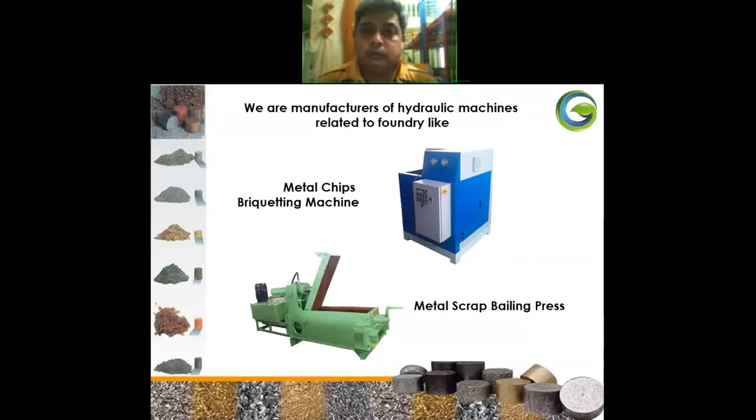Now we'll go into our topic, that is briquettes. First we would like to explain what is meant by briquetting, that is metal briquetting. Briquetting is a process that compresses metal scrap and waste into compact, easy to manage blocks, with density and resale values that rival those of solid metals.

Basically, briquetting is compacting the loose material available, maybe boring in the form of turning or any loose content. So when we compress that material, automatically the density of that material increases and the surface to weight ratio is reduced, due to which that material becomes very easy for transportation, for handling, for melting.

Various losses occurring during the use of this loose metal can be reduced. What type of losses, we'll see afterwards in this presentation.

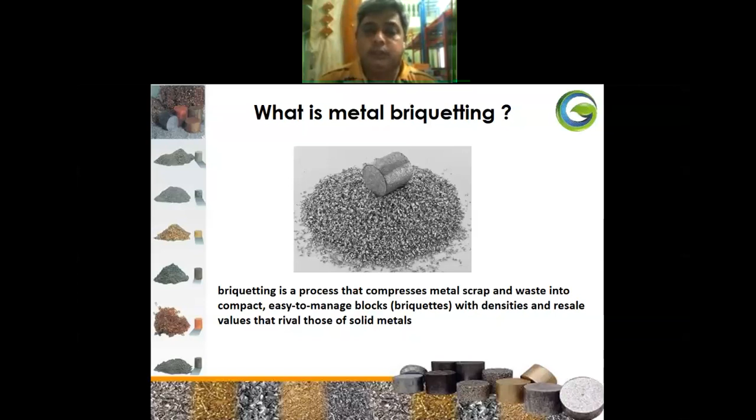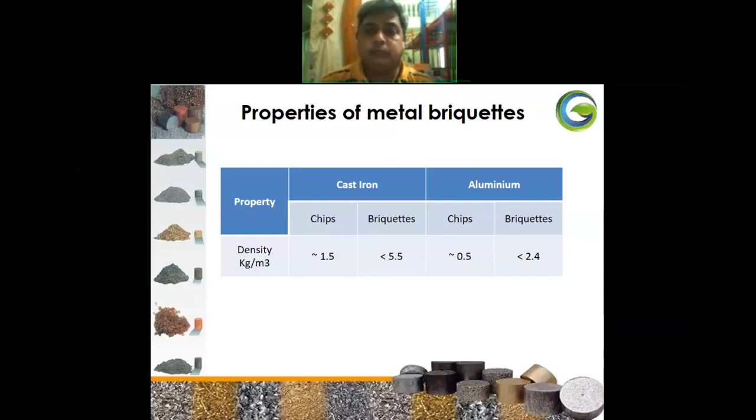So the side benefits we get after briquetting material: we can recover the valuable cutting fluids. Because any boring or turning coming out of machining has almost 50% cutting fluid in that material, and it is very difficult to take that cutting fluid out of the boring.

One method is that we can use a centrifuge. By centrifuging, we can take out the material somewhat, but some cutting fluid will remain in the boring or turning. Because of that liquid, the material easily gets rusted. And when we use the material after 3, 4, 5 days in the foundry, we use the somewhat rusty material, which automatically gives a loss in using this material.

By briquetting, we can squeeze all the cutting fluid oil from the chip, and the oil will remain on the surface of the briquettes. So that oil we can reuse from the briquette, and because of the oil coming out of the briquette, the briquette will not get rusty as fast as the boring or turning would.

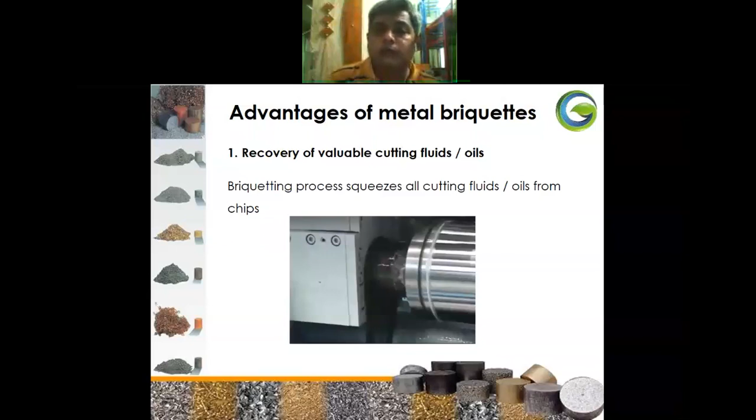Second, we can reduce spillage losses of chips, because when we transport or handle the boring or turning, it gets spilled everywhere—in the machine shop, during transportation, in the foundry, during use in the furnace. Everywhere some material gets spilled, and we don't get an account of that material at the end of the day. On average, 5% of the material gets wasted in spillage only.

So we can avoid those losses due to spillage of the metal during loading, unloading, storage, or charging.

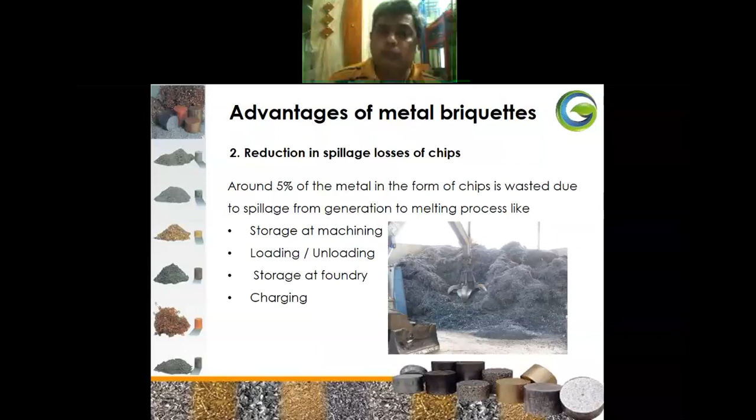Third is that transportation cost we can reduce. Suppose a truck takes load of maybe 1 or 2 tons of boring or turning, then it can take 3 to 4 times more load after briquetting the material, maybe 6 ton or 10 ton. So automatically your transportation cost will also come down.

We know that we are getting loss in the coolant, in the form of spillage, in the form of transportation, but we are not getting that accounted in our heat calculation, means heat cost, that will not get accounted.

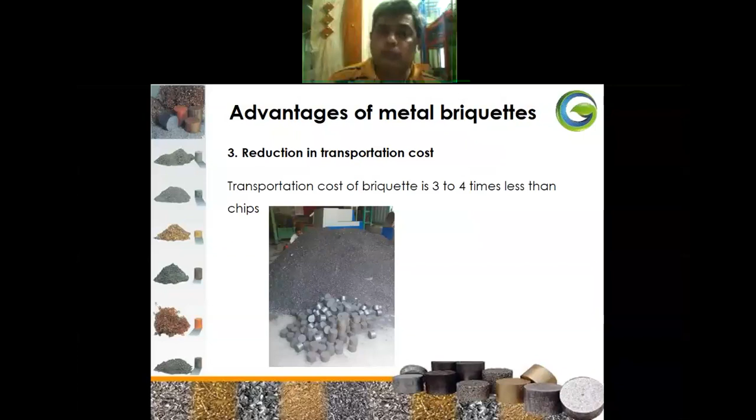Fourth is that we can avoid mixing of dust and other particles. Once boring is briquetted, dust or other foreign particles will not mix, and maintaining clean input for charging reduces slag generation during melting process. Even the mixing of one turning or boring of SG iron or cast iron, that mixing also we can avoid by doing briquettes. We can separately identify that. So this type of things we can avoid, which in turn at the end of the day happens in the form of loss to the organization.

It reduces oxidation of boring in open environment due to less surface area to weight ratio. Briquette oxidizes less than boring in open environment, which reduces slag generation during melting process. At the end of the day, when slag generation is more, then your lining life will also be reduced because of that slag. So that lining cost again we can reduce by generating less slag in the melting process. That also we can avoid by doing briquettes.

Due to less surface area to weight ratio, briquette oxidizes less than boring during melting, due to which slag generation will be reduced, furnace lining will be improved, molten metal will be increased, and all this what I am discussing today is actually what we have filled in the actual foundry shop floor. We have explained a lot of things in various foundries, and we have shown them where your boring or turning is giving loss, maybe small percentage, to your foundry. Actually we have seen that in the foundry shop. So what I'm talking is very real.

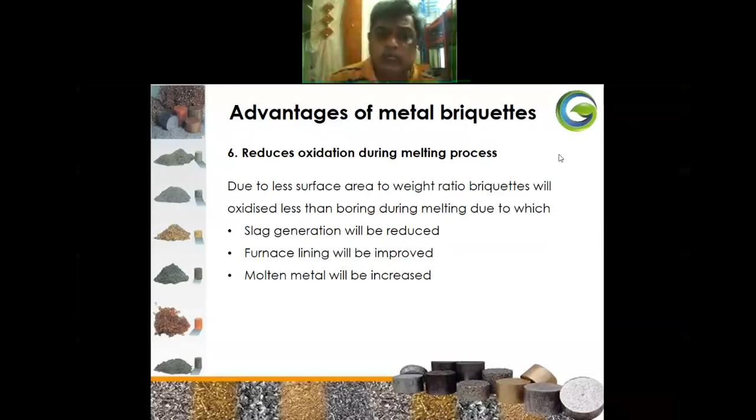Then last and very important is reduce electricity consumption during melting. Briquettes require very less electricity to melt than boring, which saves electricity. It is very clear that any solid metal will melt very fast or very uniformly than boring or turning in the foundry.

These are the seven benefits of making briquettes that I have listed. There are other small areas also where you can save by doing briquettes. You can reduce the time of your heat. Suppose now a heat is required to complete in maybe 1 hour, so you can also reduce the heat time, like within 45 minutes you can take it. So that is also a benefit of using these metal briquettes.

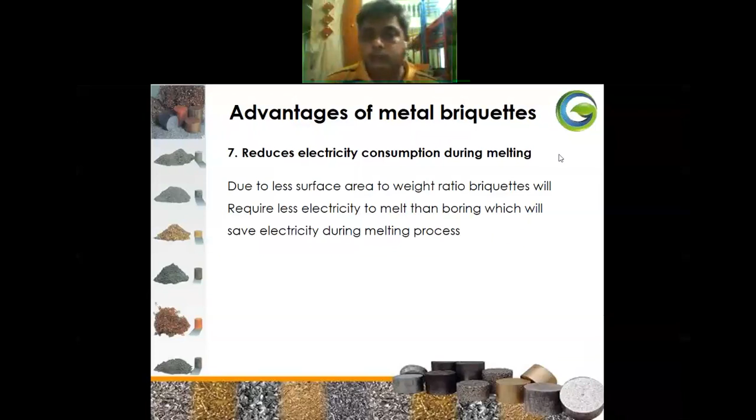We can increase the capacity. One thing I would like to share with you is that whatever I am explaining, we have done this by all calculations. We have not copied this machine from anyone in the market, that the machine's cylinder will be like that one. We have actually developed this machine. So as per your requirement, we can calculate the capacity required, tonnage required, power required. All this we will calculate and give you the proper solution for briquetting as per your requirements.

So now let me explain one trial. A lot of trials are conducted in various foundries, and a lot of data we have collected. So one foundry result I would like to show you. Before that, what will the briquette cost? That I will explain to you.

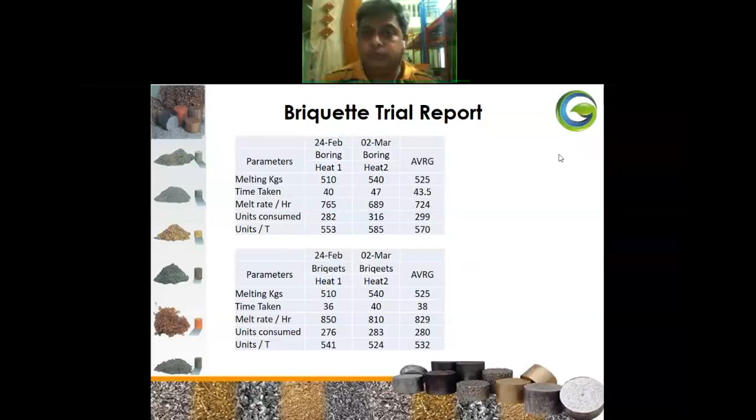So you see the overall results in terms of time, melt rate per hour, and unit consumption, you will see somewhat improvement by using the briquettes. If we analyze this data, melt rate per hour is increased by using briquette, whereas power consumption per ton is also reduced in case of briquettes.

The conclusion is that by increasing the melt rate, you can take more heats per day, maybe around 6 heats of 500 kgs per day. So automatically your production will be improved, increased by this briquettes technology. You can also reduce power, electricity consumption, that is around 570 to 532 per ton in case of briquettes.

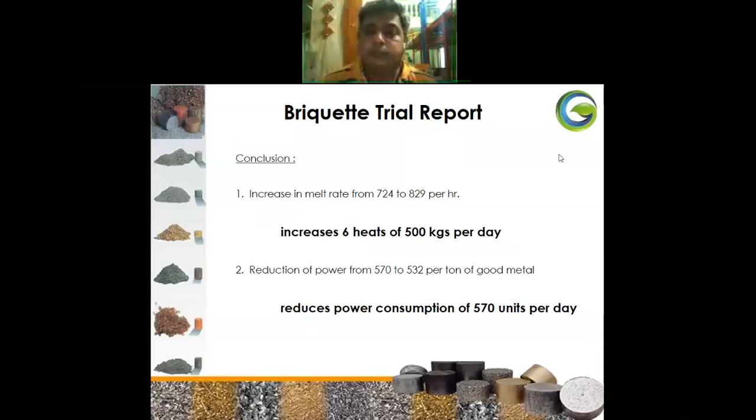If we calculate on a daily basis, you can reduce around 570 units per day in case of briquettes. If we calculate 570 into 10, you can save around 5,000 to 5,700 rupees per day. By considering this, if you calculate the payback period of installing this briquette machine, it may become around 6 to 10 months.

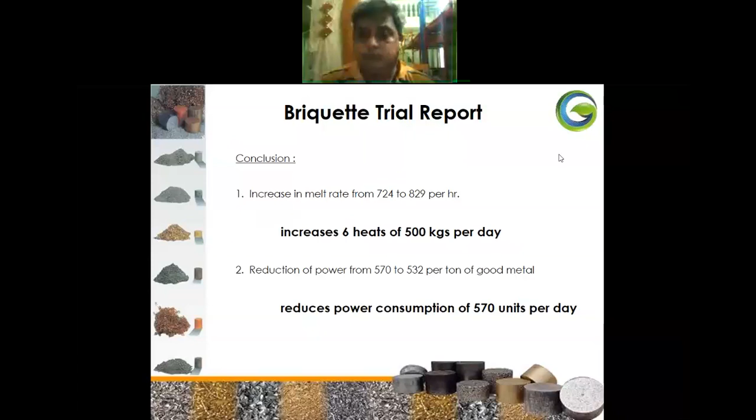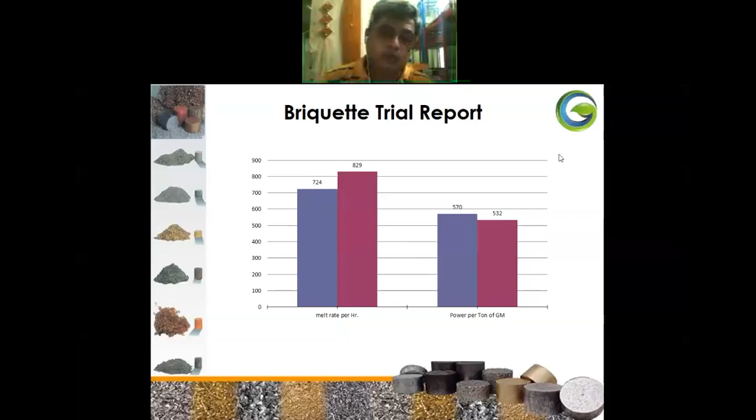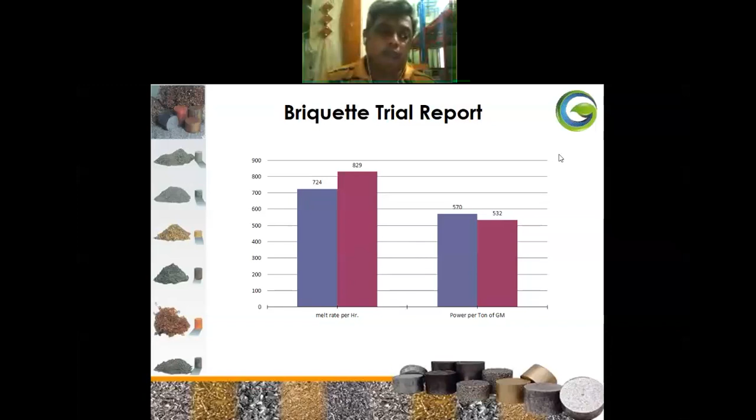So after that you will get profit only. This is the technology. Actually, it is not a new technology, it is very well used in foreign countries, mostly in China. China is using this very widely. Some of our north states are also using it right now, on a very large scale. But in our particular region, I am getting very less response for this technology.

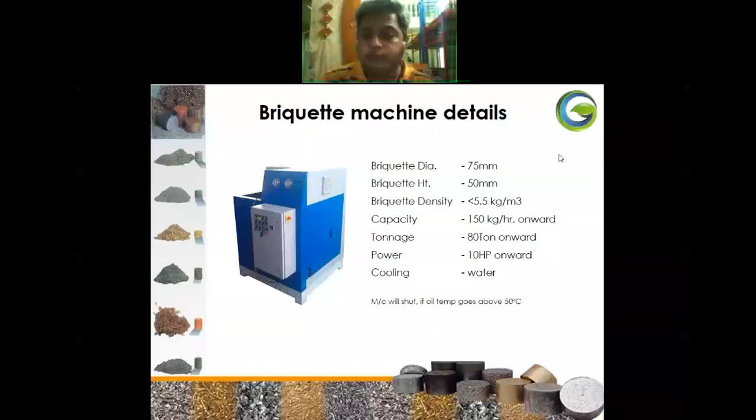So I request all of you to think about this technology. This is a very good technology which can definitely improve your foundry practices. So I request all of you, in case of any question, you can contact me right now, or maybe afterwards, you are most welcome.

Thank you, Ashish. Sandeep sir, please. Thank you, Ashish, very nice presentation. I have one question, Ashish.

You have conducted these trials in few foundries. What is your experience? How much percentage of boring can be used with this briquetting?

Any specific data? Right now, I'm visiting various foundries for other reasons actually. But now, due to the increase in raw material costs, I've seen most foundries are using very less pig iron. I'm not an expert in that, but I'm just sharing my experience. So they are using very less pig iron, and using more other raw materials like MS or boring, very widely actually.

So in that case, you can replace some part of pig iron with these briquettes, maybe around 50% of briquettes you can use of the total charging.

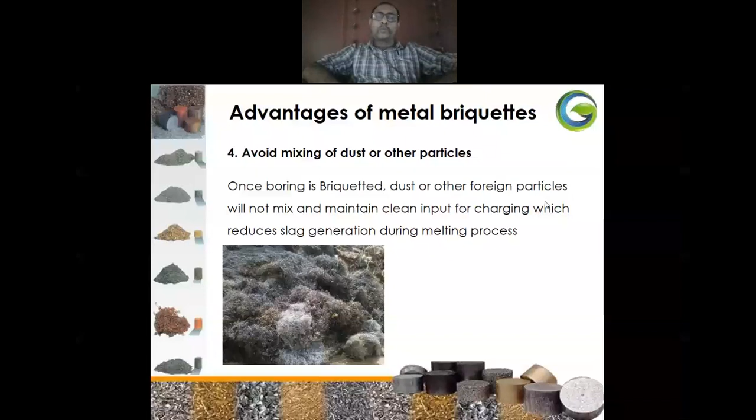That's true. Okay, but I think this is the need of the time, because raw material prices are hiking, and I don't think they will come down easily in the future as well. So I think this is the right time that they should also think of investing in this kind of technology where they can get a good payback period.

They can improve their productivity, reduce cost, and of course it will also help reduce the fatigue of the operator. I think that particular point has been missed in your presentation as well - the fatigue of the operator to remove slag and these things will get reduced drastically, and they will be happier than anybody else by using these briquettes.